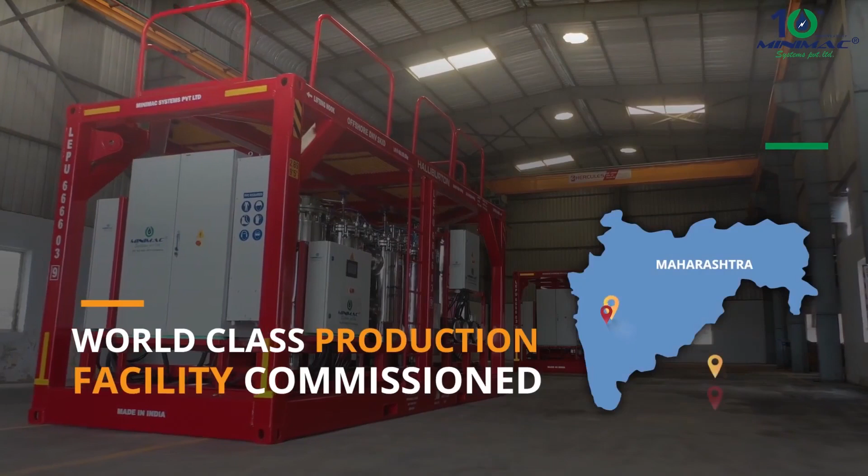Minimac Systems was ideated with a vision to spearhead technological evolution in the field of industrial lubrication reliability. At Minimac, we are driven by the thought that tomorrow must be better than today. This keeps us ignited for continual improvement and to find a better solution in line with sustainable development and cost-effective products.

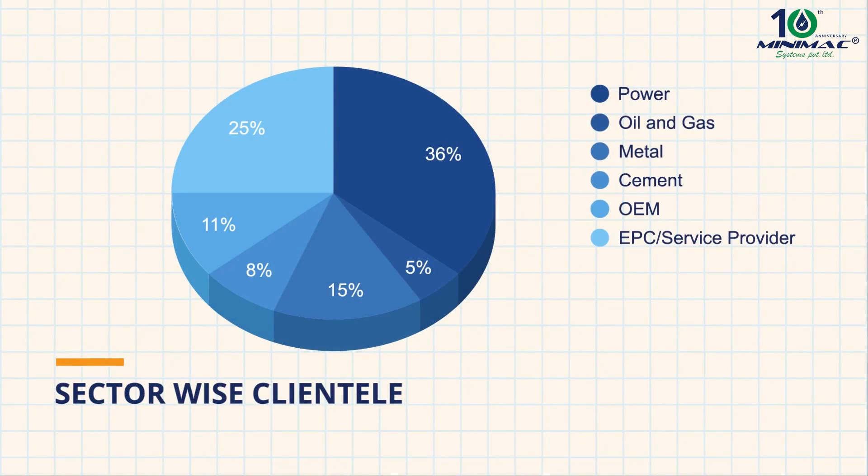We help these companies achieve their profitability by either increasing the reliability of the machines or reducing their operating cost by reducing downtime. Minimac implements EJSS very strictly, that is, End Job Satisfaction Survey.

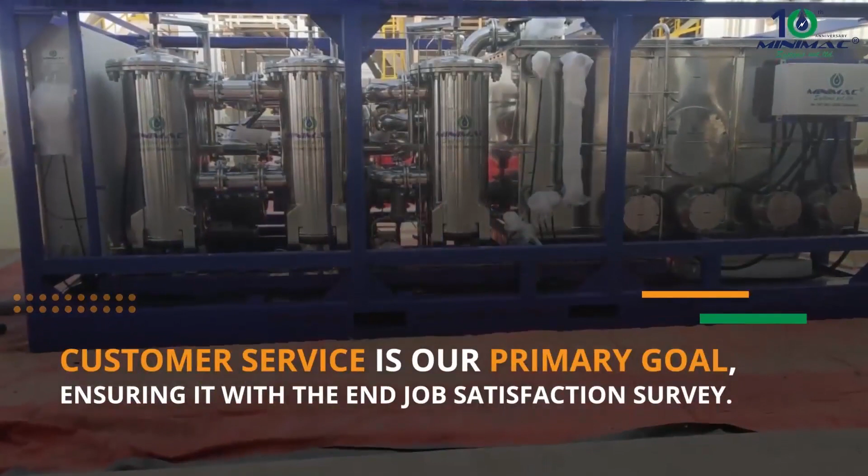Minimac believes in prompt delivery within a lead time of 4 to 6 weeks because we understand the customer's requirement. As he ordered us, we have to deliver the goods within a stipulated time period.

As you already know, Minimac has a global presence and is a multi-sectoral company. Being available in front of our customers at the right time with the right product is quite challenging for us.

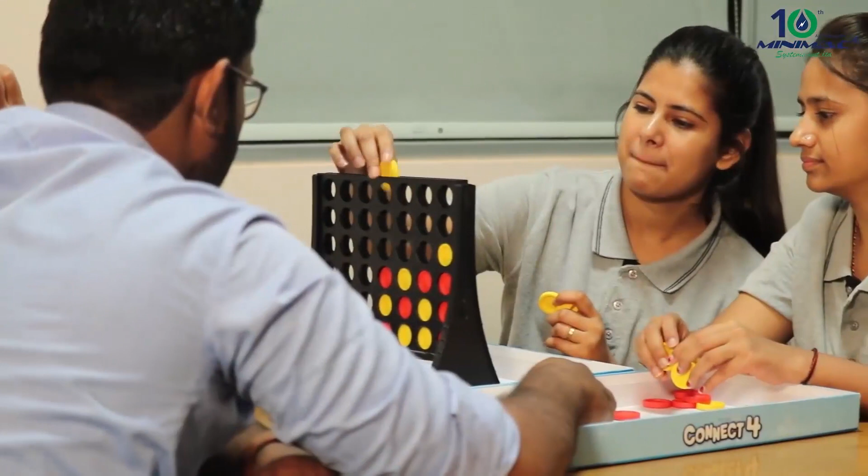As a company, we are focusing on youth empowerment, as 40% of our strength is between 21 to 26 years. We are also ensuring gender parity in all our recruitment drives. Every year, we are hiring fresh engineers and management trainees for employment and internships.

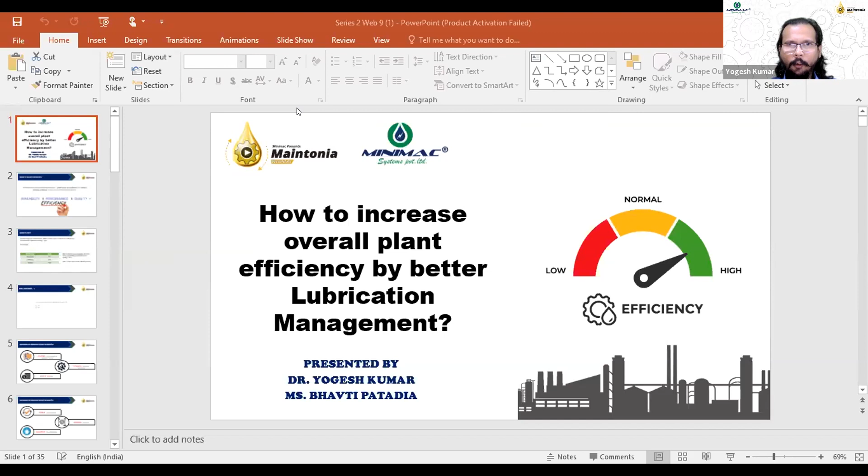Okay, we have very good poll results. So 80% say yes, they do oil test before replacement or top up. That shows that audience are very much aware, and we are very happy to know that audience respect the equipment quality so much that they check it in depth. Thank you, everyone. Next slide, please.

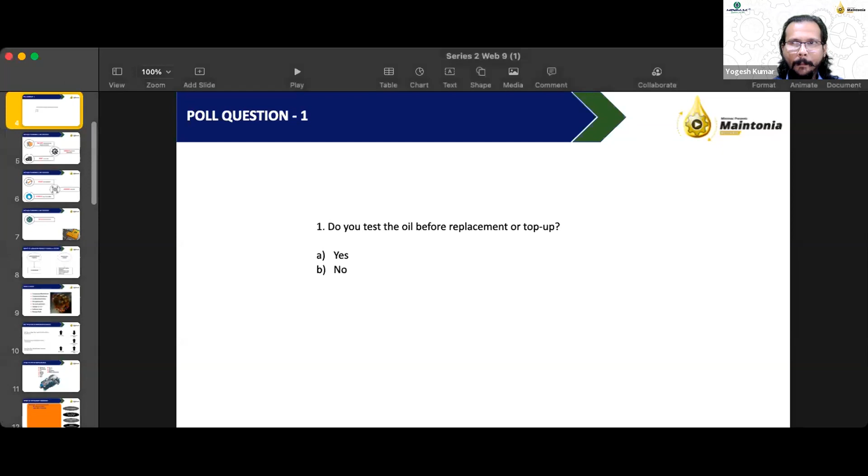Talking about methods to improve plant efficiency, it's important to analyze the current practices, processes, and equipment in use at the plant. It is equally important to know the designs and evaluate them. So timely, continuous evaluation of the entire processes, designs, lubrication management, procurement processes and policies, and maintenance policies should be done in order to achieve plant efficiency.

The second important step, usually overlooked, is investing in training. Timely investment in training your personnel, professionals at the plant, is equally important on how to handle not just the lubricant, which is one of the major raw materials used at your plant, but also small equipment—how to do testing, sampling, regular checks, and how to notice the triggers the machine is giving. Investment in training human resources on various aspects of safety improvement and efficiency will eventually lead to achieving plant efficiency.

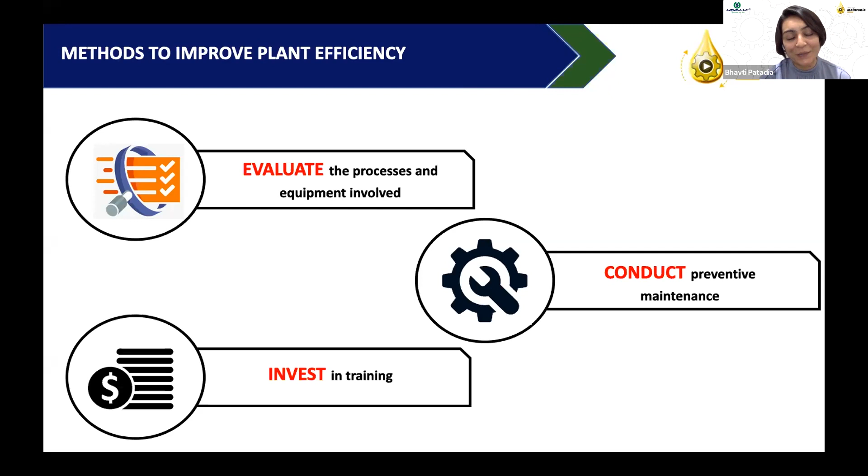And conducting preventive maintenance—I'm sure there are maintenance practices followed at your plant. Some have an entire chart and schedule of preventive, predictive, condition-based maintenance practices. That's a different topic and will require a detailed webinar. We have done it in the past; you could go through it as well. These are the three points.

Along with it, updating your equipment. Moving with the technology, moving with the updation that your plant and manpower requires, is equally important. An investment in updating your equipment as per industry demand would eventually lead to plant efficiency, followed by automating your technology.

Here we're not talking about automating something just to make the task easier, but using technologies in your equipment and plant to make tasks and people at hand smarter—smarter decisions where there are fewer chances of human error, where negligence is not a concern or doesn't lead to major loss. The triggers nowadays could come through a phone notification. There are a lot of IIoT platforms, IoT, augmented reality, and AI tools available that could be used at your plant level so these triggers are not ignored and the right solution is provided at the time, avoiding a bigger loss or riskier situation at your plant.

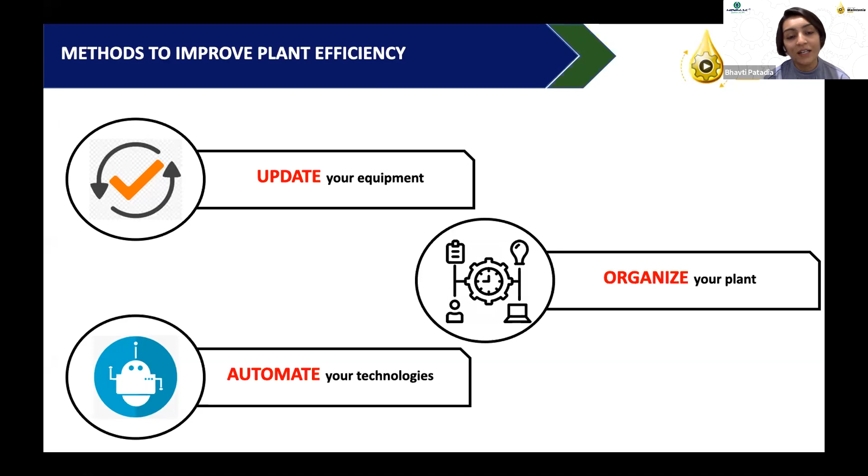And last but not least, reducing material waste—a very important factor, which is why lubrication procurement goes through a process, with certain parameters we'll study in the slides to come. This directly impacts cost: raw material wasted is a reduction in profitability. Lesser raw material waste would directly increase profitability at your plant, which also leads to plant efficiency. So these are the factors which, if implemented at our plant, could improve our energy efficiency by at least 0.5%, one step closer to achieving 1% efficiency and beyond.

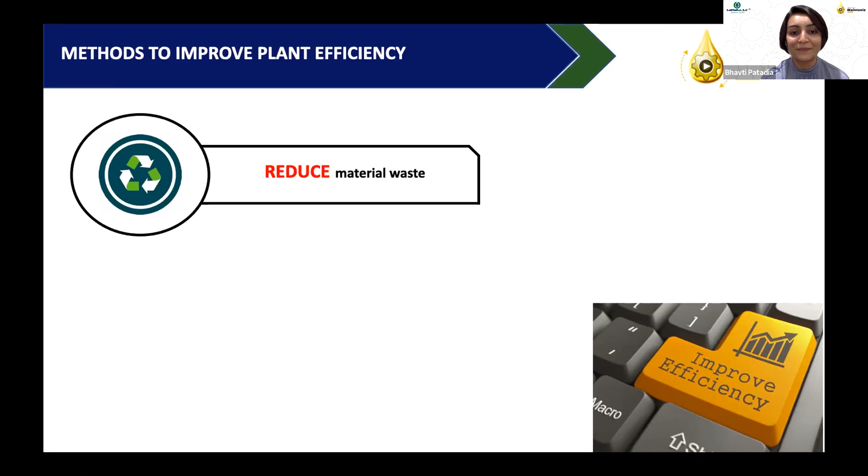Talking about the impact of lubrication reliability across all sectors, I'll pass it on to Dr. Yogesh again. Sir?

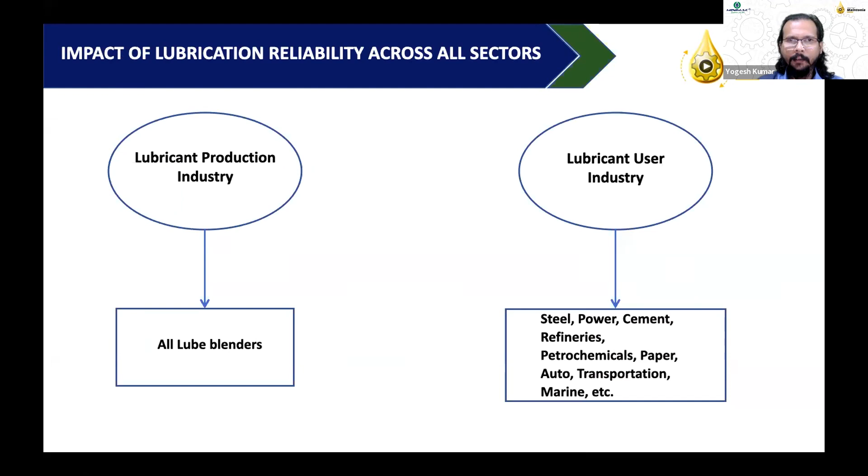Thank you, madam. So lubricant is a word related to two different sectors. One is the sector where it is manufactured or produced, and another is the consumer sector. When we talk about lubrication reliability, it impacts both sectors. How? The reduction in consumption of lubricant will directly impact the carbon credits or carbon footprint generation in the refineries, in the oil rigs.

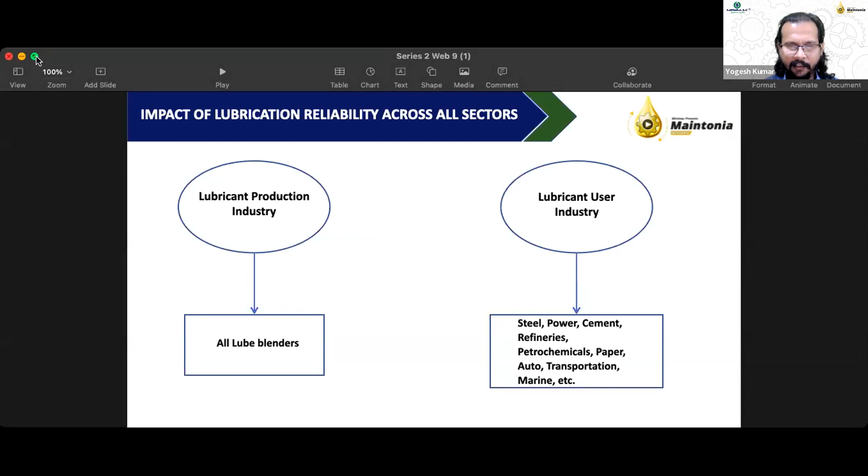And the second part, where the user comes into picture—like steel, power, cement, automobile, transportation, marine, etc. If lubrication consumption goes down, the cost of production or cost of generation will come down, so overall profitability will go up and carbon emission will also go down. So if we see the overall impact, saving one drop of lubricant is saving for our industry, saving for the environment, and at the same time we are saving at the point of generation, which is the refineries or lubricant production industries. Next slide.

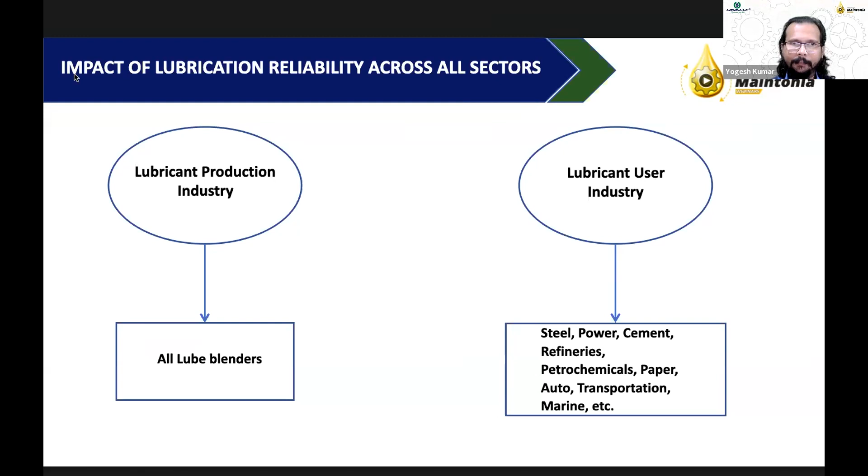To avoid failure is the topmost motto of every industry. So how to avoid failure has multiple input factors, like contaminated environment can be avoided, so contamination addition to the lubricant will come down. Contaminated lubricants should not be kept in service. How to do it? Test your oil before filling an equipment or going for oil top up.

Insufficient or over lubrication, both are dangerous. Insufficient lubrication will lead to failure of component due to high friction. Over lubrication will lead to failure of component due to low heat dissipation. Heat will not come out of the friction surface or rolling surface, and gradual increase in temperature will ultimately result in component failure. Then, wrong lubricants.

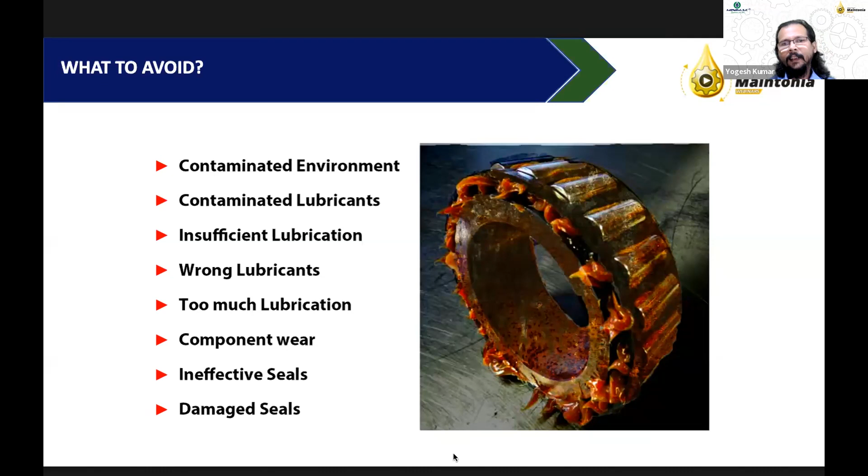Now coming to best practices in lubrication reliability. This is something we all know, like we should not speak lies, we should not harm anyone, but we do, sometimes knowingly, sometimes unknowingly. So best practices are always there in our mind, but we always keep it as a special slide in our webinars, just to remind it, like a saint or priest sometimes does in their discourses.

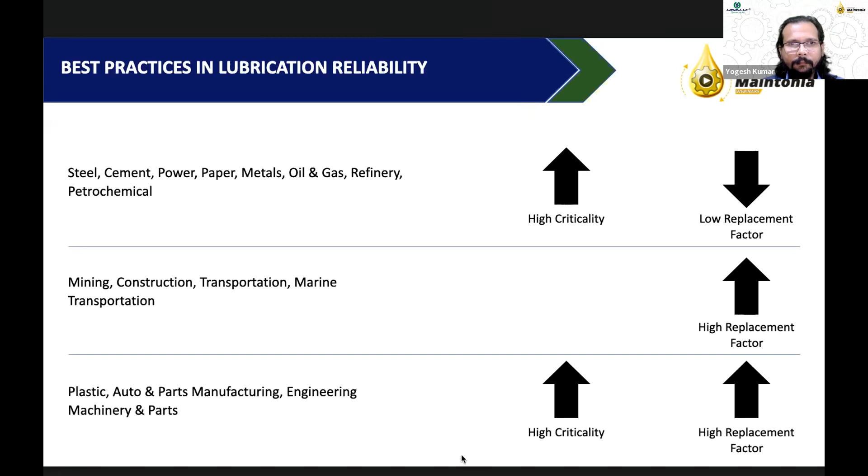So just now we were talking about contaminants, as discussed in the mining industry, where we have to work with minerals. The rate of degradation is very high compared to industries away from dusty environments. So what type of contaminants do we need to check on a regular basis?

These checkpoints are not valid for every equipment. These are the total checkpoints. Maybe 4, 5, 6 or 7 are specific to a particular equipment, and the remaining may be valid for another equipment. Like moisture, it is common for all.

Chemicals, air, water, glycol, these are common for every industry. Now coming to heat, yes it is also almost common, but soot is common for the automobile industry mostly, or high temperature applications like drilling. Foam is also a very important factor for every industry, but in some cases like quenching oil, foam doesn't play a vital role.

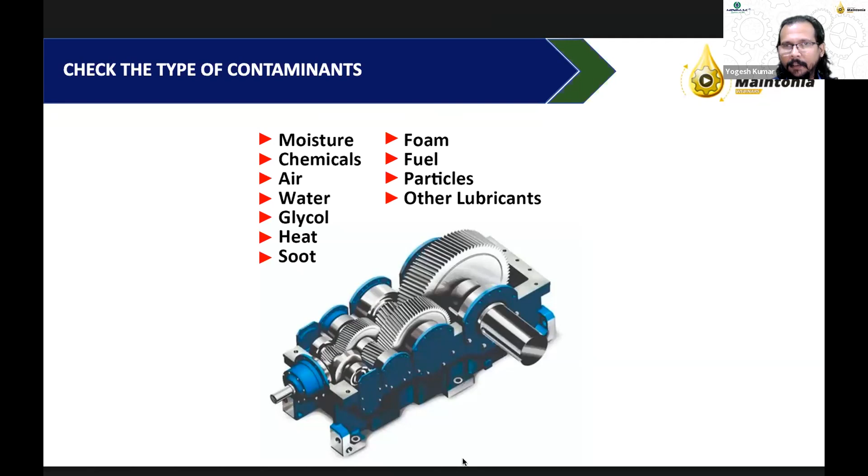Next slide, please. So all of this we will go through in detail in our upcoming slides today itself.

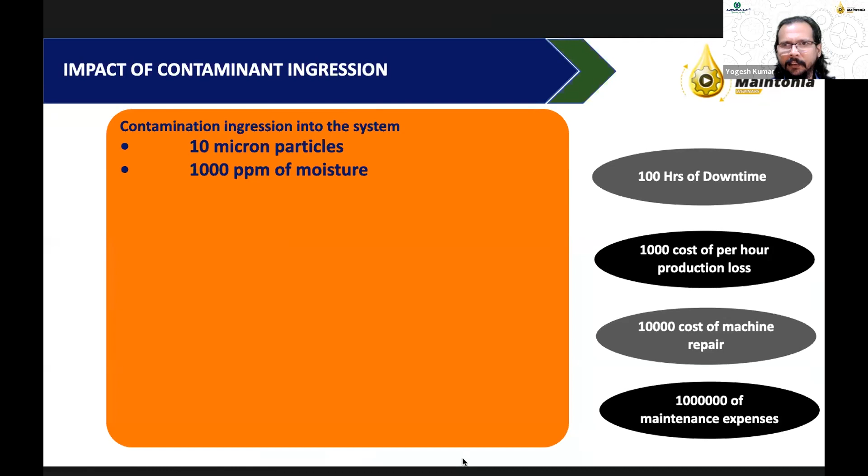We can jump this slide because these are nothing but already discussed.

Okay, a poll question again. What's the frequency of varnish testing in your company? Till now, we have not spoken a single word about varnish. We were talking about all types of tests and contaminants. So why did we miss this very important topic, varnish?

We will see why it was not taken till now and why it has to be taken in the upcoming slide. So what is the frequency of varnish testing in your company? Maybe quarterly, half yearly, yearly, or sometimes we don't test it. Sometimes we don't test it because OEM has not recommended it, or awareness level was not up to mark, or our application is such that varnish has no role. This may not be true - this may be an assumption that varnish testing is not required here.

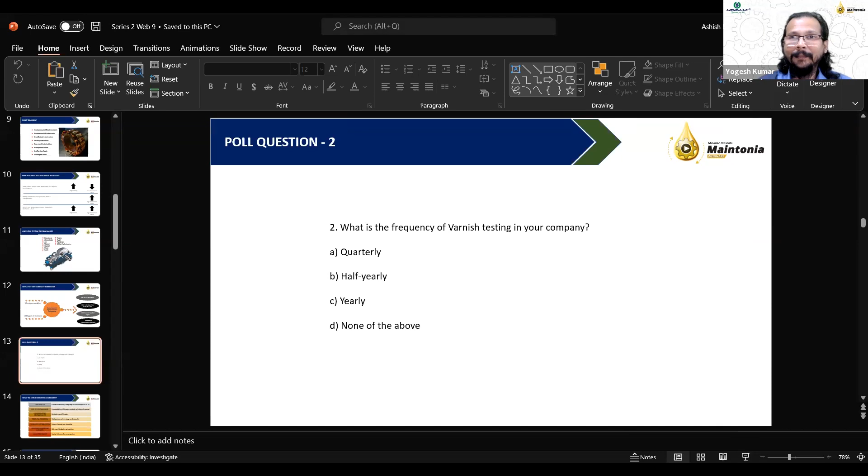So please vote. Okay, this time we have a mix of results. Maximum 33% quarterly, then at the second level, none of the above. Then we have half yearly and yearly, almost 17 and 23% respectively.

Okay, so we will see whether varnish testing shall be done or not, and then at what frequency it should be done.

Varnish is a very interesting topic, and surprisingly, across the industry what we saw practically, people are still trying to validate Newton's law. Once it is validated and accepted by the universe, if we still try to check whether Newton's law is right or wrong, then we are wasting our time. We have to think ahead of this. The same thing is happening with varnish.

Okay, so what to check before oil procurement? Now we will go one by one from procurement to application, then discard of the oil. So when we are going for oil procurement, we have to check grade of oil - not only for oil procurement, but for the oil purification system as well, valid for both.

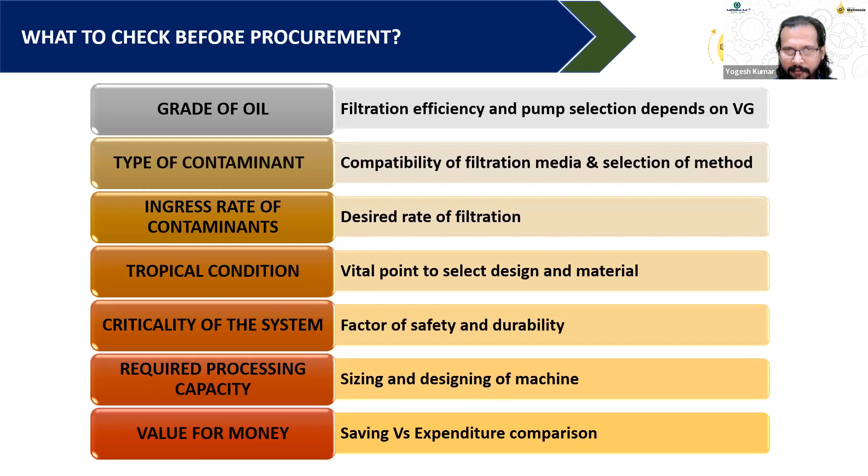Value for money - yes, we are talking about all these things. Ultimate goal will be saving, in terms of resources, environment, and definitely money. So selection of machine or lubricant should be in such a way that optimum utilization can be done. It should be not undersized, not oversized.

Next slide please. So this is a chart made based on the selection of machine and contaminants.

Like for the solid contaminant, out of 5 machines are capable, but should those 5 be used just for solid contaminant or not - you have to see the capability of the machine. Like MLC LVDH, it is capable to remove multiple things. If we talk about the FS series, it is just for solid contaminant. If we talk about the TRIX, it has the most wide range across the machines. But whether this is required for our application or not, that needs to be judged carefully always.

For the varnish, you can see all the machines are in the yellow zone - no red, no green - because varnish is something different. We need to understand this.

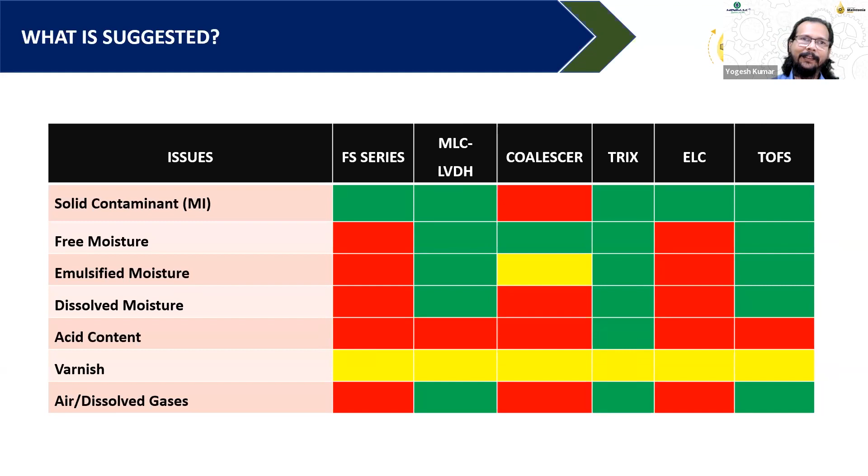Next slide please. If time permits, before completion of today's webinar we will get into depth of this varnish. Otherwise, we will try to cover it in brief.

So after procurement, reception - now see how contaminants are getting added. Blending of lubricant, because base oil will get blended with additives, is done in a chamber, then transferred to multiple pipelines. So there is a great chance of especially solid and moisture contaminants addition. Because suppose one tank is empty - empty means it's empty in terms of lubricant, but air is inside. When we fill the lubricant, air will come out, but the impurities will remain in the tank, so they get mixed with the oil.

Storage tanks of lubricant - tanks, barrels, or sometimes we call them IBCs, intermediate bulk containers. Those are manufactured by someone else, not by the oil manufacturing companies. And the process of manufacturing itself leaves back lots of contaminants. When we fill the oil in the tanks, barrels, or containers, contaminants get added with the oil.

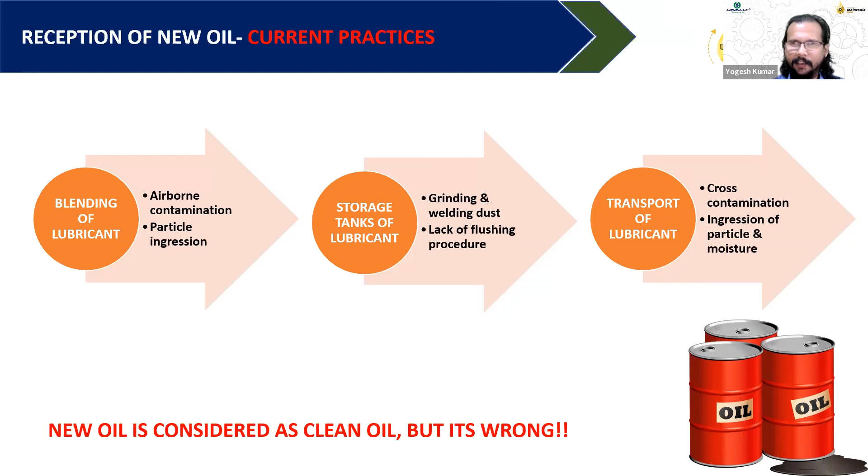Next slide please. So when oil is received at our end, now what to do? First, go check with the sticker or label pasted over the barrel or container.

We are not blaming someone especially, but sometimes it happens - tampering of the content during transportation, or some wrong formulation of oil has arrived at site. So we need to check the label very carefully. Oil has limited shelf life, so how much life has already gone, whether this batch is new or old, like that.

Then the lube test certificate - that is always provided by the supplier if we ask. So always ask the supplier to send it along with the lubricant.

Then when a batch arrives at site, we can go for random testing of a few barrels. Suppose 100 barrels of oil received - we can take a sample of 5-6 barrels randomly. We can check for moisture, viscosity, and particle test, and it will take hardly 10 minutes to perform all three tests if we have portable devices with us - and definitely we should have them handy always.

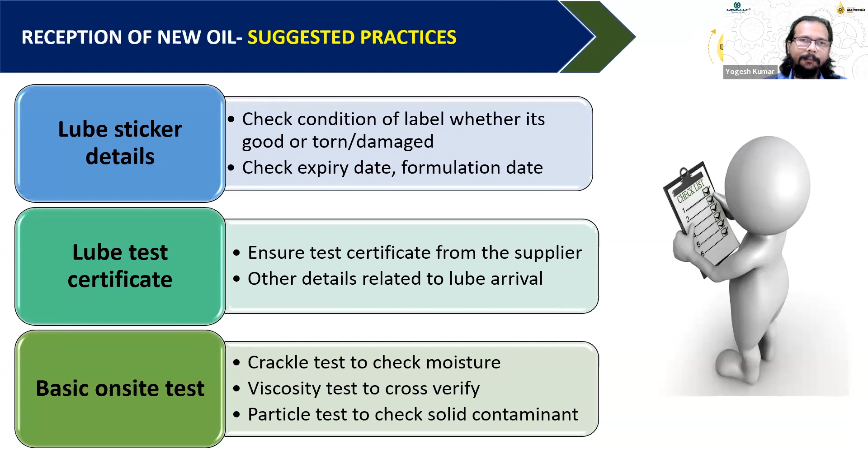Barrel breathes, yes, of course. You might have noticed before also, you can see ribs over the barrel, two lines. They act as stiffener up to certain extent, but they also act as expansion joint. Whenever there is variation in temperature, the volume of oil will vary since this container is sealed. So to take care of the expansion or contraction of the barrel, these ribs are there. Still, oil barrel will breathe because this is not an airtight seal, never. So whenever the tank breathes, it inhales contaminated or moisture laden air, and whenever it exhales, pure air. Why pure air? Because contaminants are already absorbed by the oil. Oil has affinity towards contaminants. Why is this affinity there? You can check with Graham's law of diffusion or osmosis. Due to concentration difference, contaminants move from one side to another side.

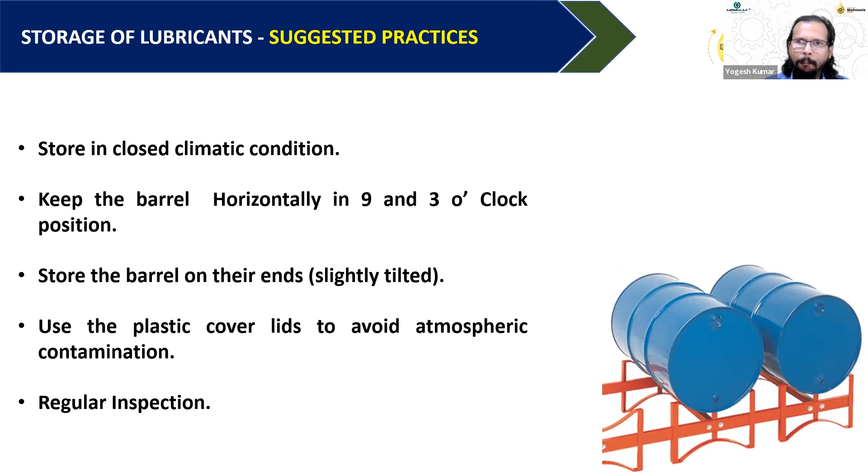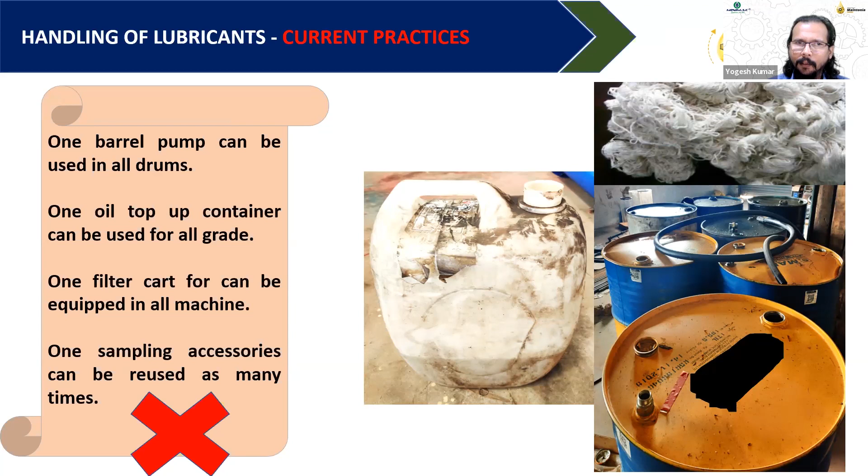Then you can see for oil transfer how contaminated pipes are thrown here and there. For oil top up, a dirty can is being used as an accessory. There are standard accessories available for all the work. If a picture is available, we can see it on the next slide. Yeah, we have.

What happens? Suppose a container has a cap in yellow color. The same yellow color, a small sticker we can put on all the lubrication points on the machine where this oil has to go. So by matching the color itself, one person can see whether he is putting the genuine oil or recommended oil, or if there is any chance for oil contamination.

Then again, if we store oil in the barrel for top-up purpose, suppose daily 2 liter or 5 liter of oil we have to take out from the barrel, then we can make this arrangement: one tap at the smaller end or smaller opening, and a breather on the bigger opening, so that as oil comes out, it will try to take in air from the atmosphere. So through the breather and fine mesh at the bottom of the breather, contamination-free air will enter into the barrel, and we will get fresh, clean oil always.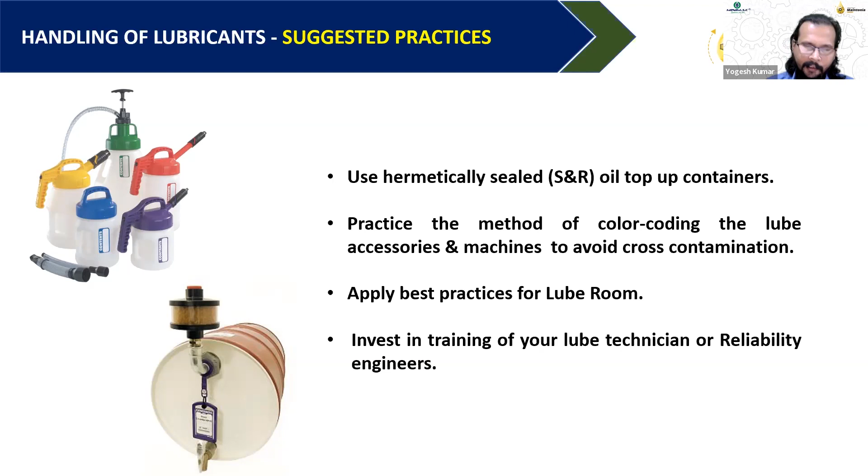And you can notice that there is a small sticker there, or card. We call it an oil tag. It has all the details: which date this barrel was placed here, what is the grade of oil, and it may be marked to which machine it has to go. These are all part of lubrication practices, and definitely training of our technicians and engineers will help us establish this system in our industry or in our factory. Next slide, please.

These pictures are not taken from any website, we took them ourselves. In the first picture, you can see the oil condition. In the second picture, you can see how the sampling was done.

What do we expect from this sample? Any result is chanceless. In the third picture, you can see the lab condition. Can we expect a good result from this lab? Even if our oil quality is very, very good, during the testing itself it will get contaminated sufficiently.

So from sampling to testing, there is always a chance of contamination addition. If this part is done seriously, sincerely, then the next part will come, which needs to be focused on again. Next slide, please.

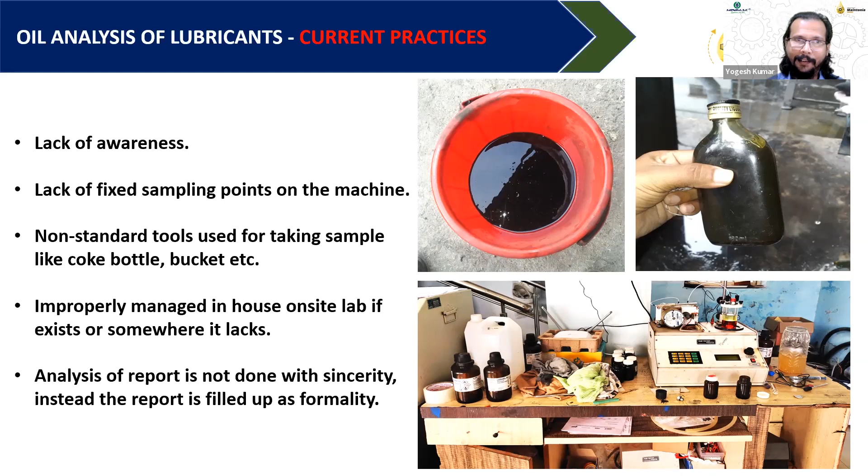This is something about oil testing or oil sampling, because oil sampling also has a standard, 11171. So what we should do during the testing, or what we should not do, then what should be the bottle cleanliness level, whether it is clean, super clean, or ultra clean, depends on the requirement of our site. Do we need an ultra clean bottle, or is just super clean sufficient? It depends on the criticality of the equipment and the test.

So if we talk about an effective oil analysis program, we need to focus on 4 factors: maximize the data density, minimize the data disturbance. Minimize the data disturbance is nothing but sampling errors or testing errors. Maximize consistency. The standard test method has to be followed every time so that the result can be analyzed or a graph can be made easily, because the result will be on the same platform.

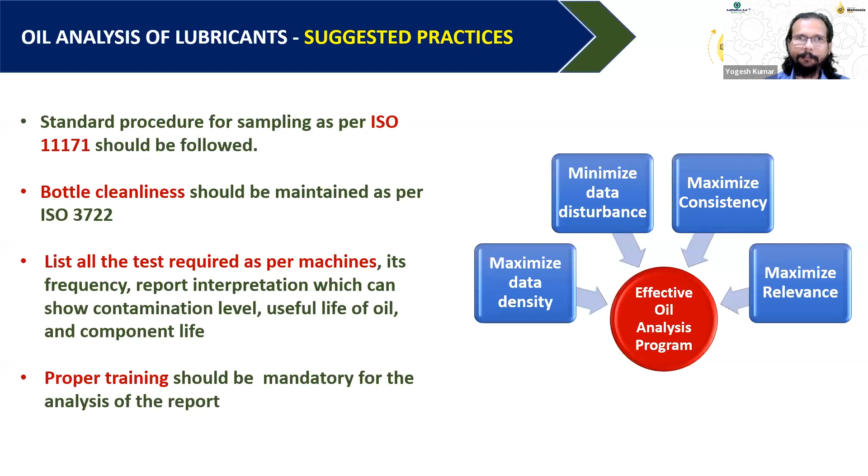Next slide, please. These are some common factors or frequency for a general machine. It is not for any specific machine, and this slide is nothing to be followed like a holy book. These are general in the sense that for applications like steam turbines, gas turbines, or boiler feed pumps, this can be followed. But if your application is something very critical or different, then certainly the frequency will vary. The test standard will remain the same.

These are the test standards. Based on these, you will get the central picture, which is nothing but the test report. So interpretation of the test report is something we have to take special care of. Just seeing red, yellow, green doesn't make real sense. We have to see why red or why yellow.

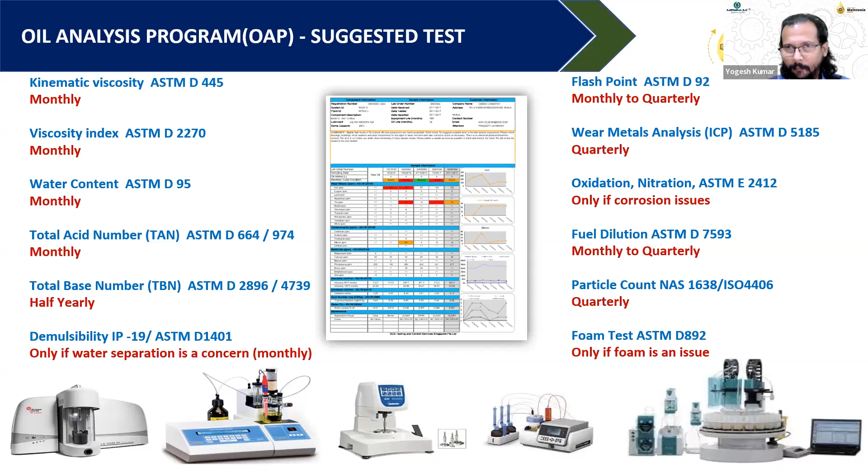Okay, let's move further because time is running short. One poll question for you once again, please give your genuine opinion. Do you think about the carbon footprint left behind? Think about what the carbon footprint is when we are doing an oil top up of 1 liter or 10 liters, how much carbon footprint will that 1 liter of oil leave? We may have an idea, we may not. Every oil has its own characteristic; some oil may leave a huge quantity of carbon behind, some may leave very little. Let us see.

Where is the poll result? Okay, 76% of the audience said yes. Thank God, and thank you audience for your awareness level. I think after this webinar, this remaining 24% will come down because we need to think over it. We don't have to think about our life only, but upcoming generations may have to suffer if we don't take care of it right now, because we live for us, we live for our children, and they have to live for their children. So everyone has to think for the next generation.

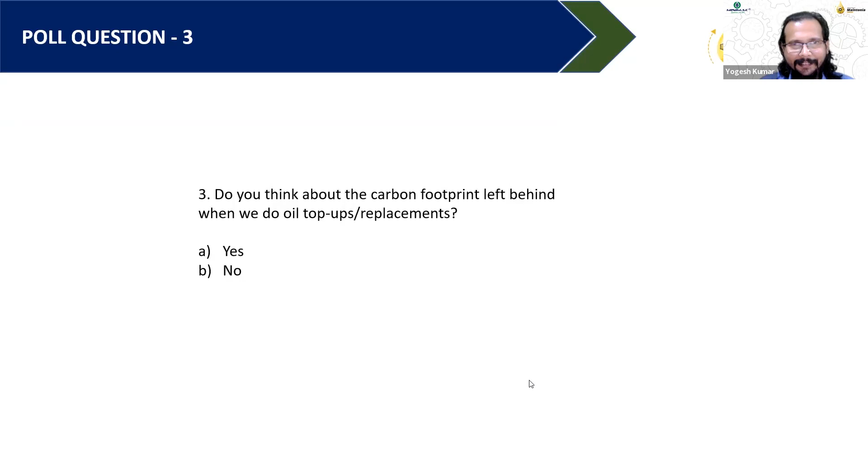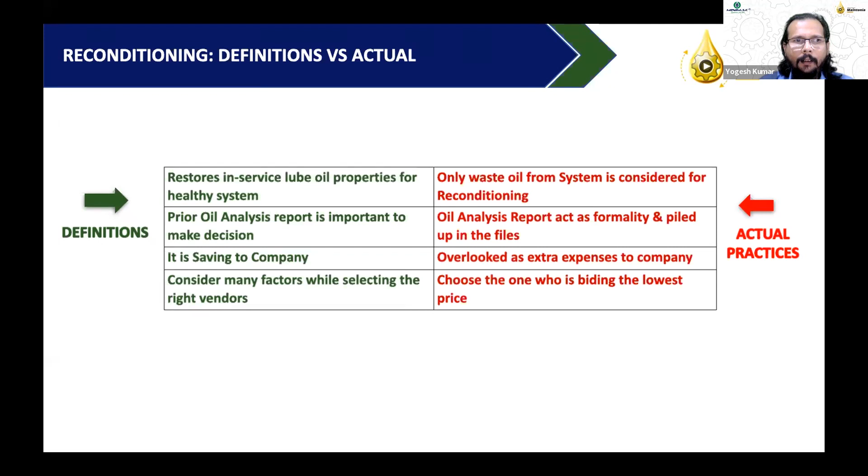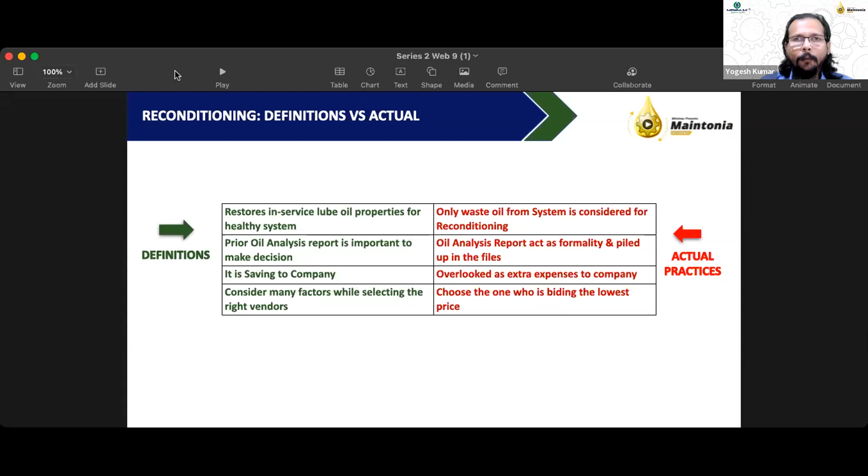Next slide, please. So now coming to reconditioning. Reconditioning is an area full of myths. What we see, reconditioning is not like that. We are not going to give life to a dead body. No, it's not that. Reconditioning is also part of preventive maintenance only. Recover it before it is unrecoverable. So here we have some definitions and the actual practice. We try to recondition the oil in service always.

And in terms of monetary benefit, they think that oil conditioning is an expenditure to the company. Yes, no doubt, oil reconditioning is an expenditure. But instead of expenditure, you can call it an investment. You spend 1 rupee, you can save 100 rupees. Or you invest $1, you can save hundreds of dollars because of it.

So when we select the method of oil reconditioning or oil reclamation, we should be very much conscious about the factors we have discussed in the previous slides. Check before you procure. Whenever you find low cost solutions, they are always welcome, but we request you to go through the checkpoints once again and see whether that low cost equipment or methodology is serving your ultimate purpose or not. If serving for the time being, then how long? And what will be the impact on the lubricant?

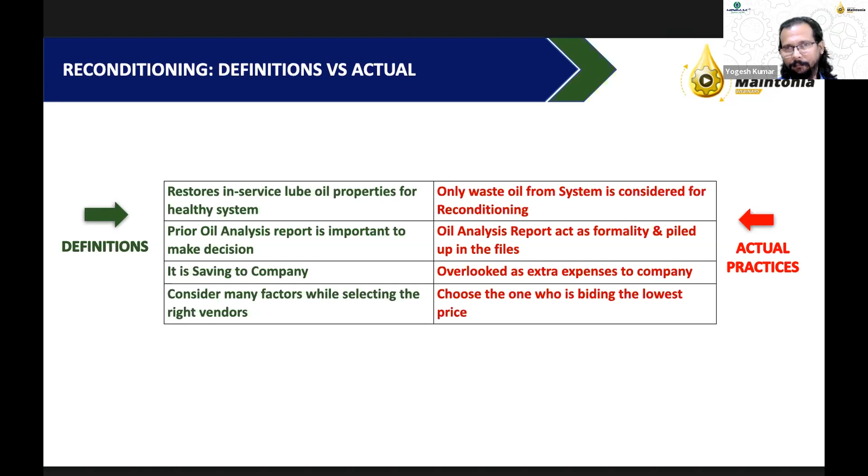So why reconditioning is important, what could be achieved, and why we should do it. We all know the benefits. We have discussed some or the other way in this PPT, though it is important to understand that extending the oil life, which is the in-service oil life, could be achieved by oil reconditioning. Increased machine reliability, that is, your machine is available for a longer time duration and in a more effective way than you think if it is not maintained well.

Reduced environmental contamination, because the contaminated oil, the waste oil, usually we discard it or we sell it to be used further as a downgrade application, used as a raw material, but it again adds to the environmental contamination.

Cost saving on oil replacement. So it is not necessary to replace your oil as and when it is contaminated. The properties could be reclaimed back so that there is a drastic reduction in the procurement cost of new oil. We have seen time and again that approximately 20 to 25% drop in procurement cost has been seen at multiple plants in various sectors in India and internationally, which eventually leads to higher profitability. I'm sure all of you are very much interested to understand the dynamics of saving the cost on new oil procurement and leading to higher profitability.

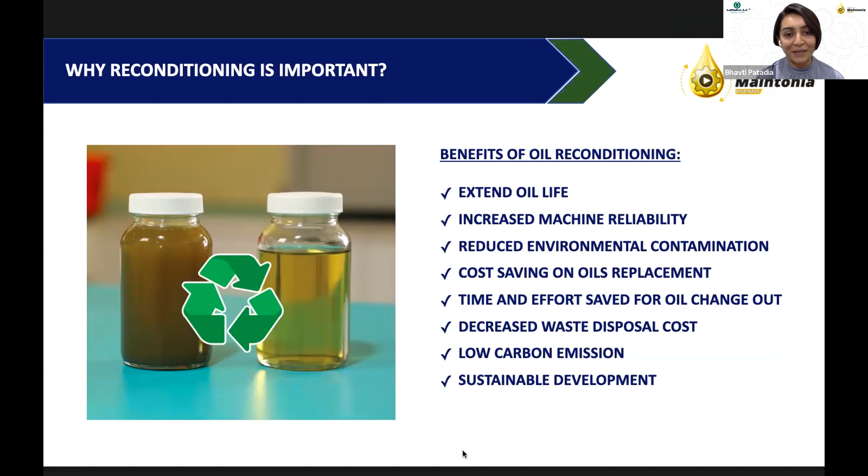How do we come into the picture? What do we do? Minimac supports end-to-end lubrication management at your plant.

Right from the point when a new fresh lubricant arrives at your plant from a lubricant manufacturing company. As we all know, in transit, once the barrel opens up, it directly gets contaminated from NAS 7 to NAS 10, 12, at any limit. We have seen many episodes recently where OEMs, power plants and steel plants require oil first fill at a very pure level, superfine pure levels like NAS 4 and 5, for better equipment reliability, leading to asset reliability. So right from the new lube that comes to your plant, from storage and handling, new lube room management, we have an end-to-end solution.

We have designed a program called Reliability Improvement through Lubrication Assessment, RELA, where different parameters of lube management are covered - best practices, handling, storage, sampling, oil analysis. We also have an MOMS team, Minimac Operations Maintenance Team and Services Provider, where we do manpower services and technical consultancy apart from the machines and expertise manpower that we provide.

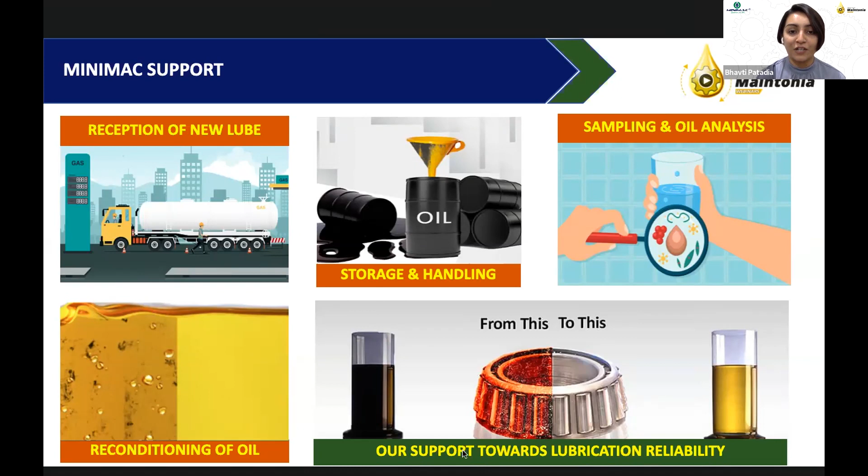How do we contribute to this? We are trying to build a circular economy and an ecosystem where we accelerate the adoption of cost-efficient technologies and practices. Kindly underline these words - cost-efficient, affordable solutions. Again, customization is our USP. As per your problem, your equipment and need, we customize the solution and provide, which improves the reliability and performance of lubrication and hydraulic oil systems.

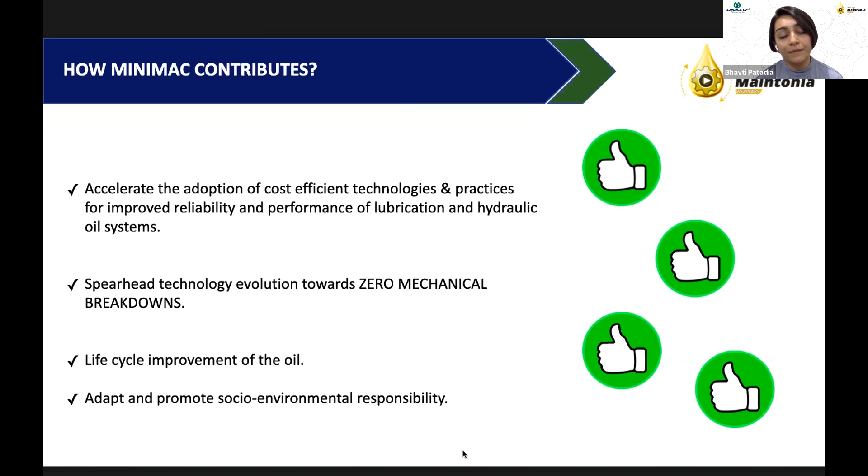Our ultimate vision is to achieve zero mechanical breakdown. With all of it together, I'm sure we will achieve it one day. Life cycle improvement of the oil, adapt and promote socio-environmental responsibility. This is how we contribute towards circular economy, towards building an ecosystem where everyone realizes that by doing their bit, by increasing efficiency, there can be a proven impact on reducing carbon emission.

Further, if you want to increase your productivity, uptime of your machines, running hours, availability and reliability - these are the parameters that matter most at a plant level. The downtime is less, the uptime is more.

So what are the checkpoints for it? We have a list of checkpoints. Some mentioned here include lubricant contamination levels, types, condition of the lubricant, different grades of lubricant, providing reclamation options like oil filtration, dehydration, reconditioning, or nitrogen capping, and reliability-centered lubrication. Considering that lubrication is 100% fully optimized in your plant till its full life is what we ensure, and for that we design solutions as per your requirement.

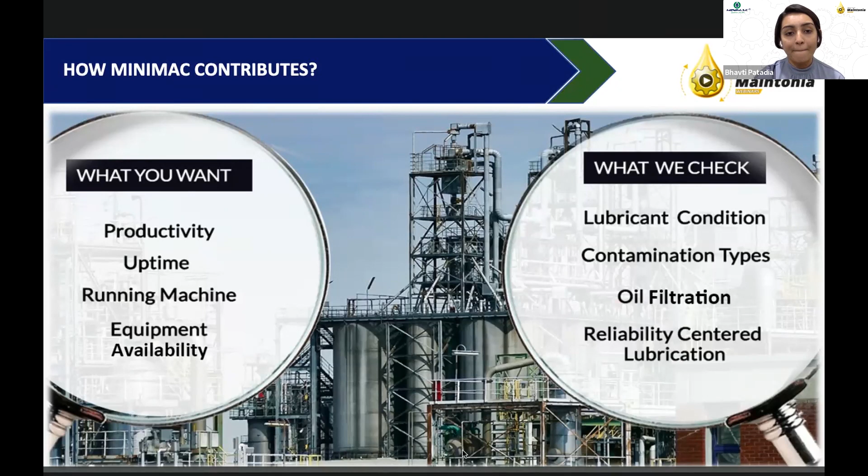Quickly running through a case study - there's a power plant in North India using Indo-Japanese technology turbine EHC system. This plant showed awareness towards lubrication reliability and opted for reconditioning of oil products and services from us. With their proactiveness, they could manage a cost of oil replacement of 44 lakhs, around $50,000, and save the downtime cost of around 1 crore. Just 15 hours of equipment downtime would have cost them a loss of 1 crore, approximately $250,000.